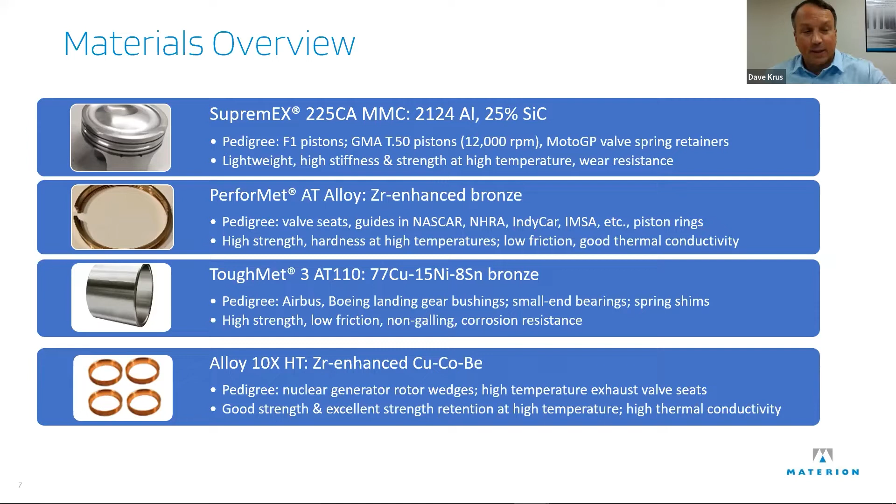So as we're talking about these materials and going into the examples, there's a couple of things that I would like everyone to remember. First of all, most people know this. With all of the design software and help that we have, and all that we already know about creating engines and building things, the only remaining limits on design are the material properties. You could design anything, you just can't find the materials to make it work.

So if you can have materials with a larger band of properties, or more of a combination of properties, it allows you to design more. It takes the limits off your designing. And the other thing is, looking at it from the other perspective, if you've got something you've designed and it's not working, it's so much easier to just find a material that works than to change the design.

There's a lot that goes in with the testing and changing the material, but just think of changing the dimensions on a print versus changing the name of the material. You change the name of the material, cross it out, put the new material in, they make it the same, it fits in. If you start changing the dimensions, then you've got to change the mating part dimensions, and you've got tolerances and all these issues that come in. So just swapping out materials, a drop-in replacement, that's a lot of what we're going to be talking about today.

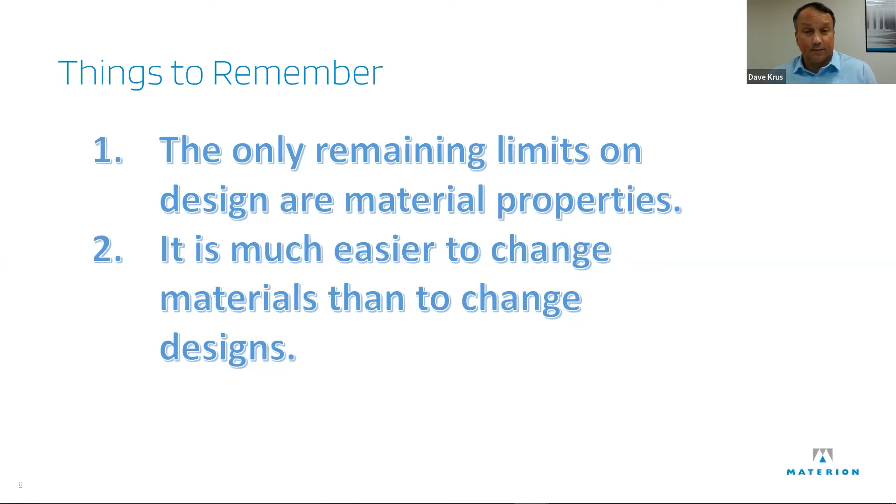So I've told you these materials are used in racing, told you they've got nice property combinations. For those of you who've seen the EPARTrade webinar that I think we did in early fall, this is a very high level overview of that, just to let you know that these materials are not only enabling design changes, but they also can last. There'll be a link after this to the EPARTrade webinar, as well as a white paper on the details of this testing.

So Materion sponsored this testing at Cosworth in the UK, and they got a 2.3-liter EcoBoost i4 crate engine, brand new, and re-outfitted it with Materion materials and redesigned the parts around it. The pistons were cast pistons with a cast-in ring groove insert. I put my cursor on it; you might be able to see there's a cast iron ring groove insert in there.

And so by switching to SupremEX, which is stiffer, still the same lightness, and doesn't need groove protection, they were able to reduce the piston mass by 20%, the pin mass by 16%, and by raising the ring groove closer to the crown.

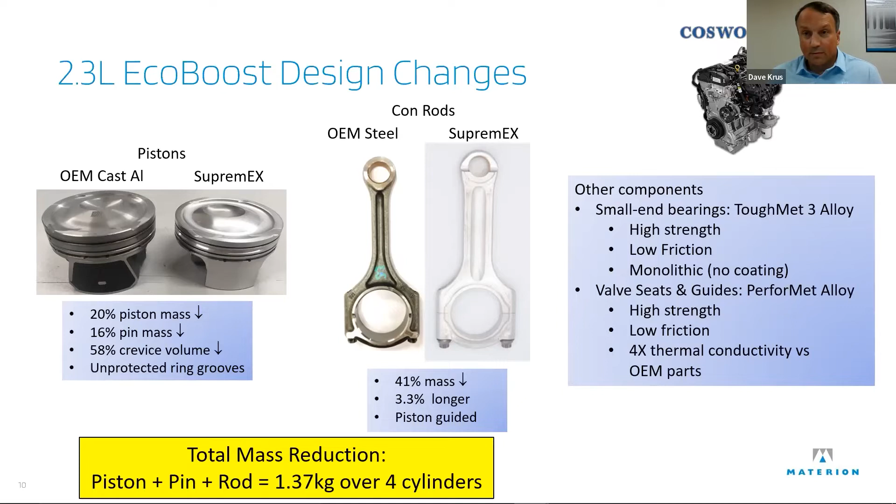So we asked Cosworth to put it through an OEM level durability test. And this is the test up here in the upper right. So you idle for 15 minutes. Then there's about 12 minutes at maximum torque, wide open throttle. Then you get max power for roughly 12 minutes, and a few minutes, not quite 5, of 90% power. Do that 225 times. So that results in 150 hours and 96 at wide open throttle, and absolutely no performance changes were seen related to the Materion parts.

They blew the head gasket twice, so it shows you they were running the engine pretty strong. And there was no measurable wear on any of the parts. They expected that from knowing what they know about the pistons and the PerforMet for the seats and guides. The ToughMet, the rod was a surprise to them. Actually, no problems at all with it. And the valve seat recession was so minimal, 1 to 2 microns of increase in valve lash. That was about it.

So these are now materials that we tell you about. They'll last, they work, they're being used in racing. So the idea behind this is having this in your toolbox. You're going to come up with this thing where if only the material would just do this. Think about these materials; that's where we're going with this.

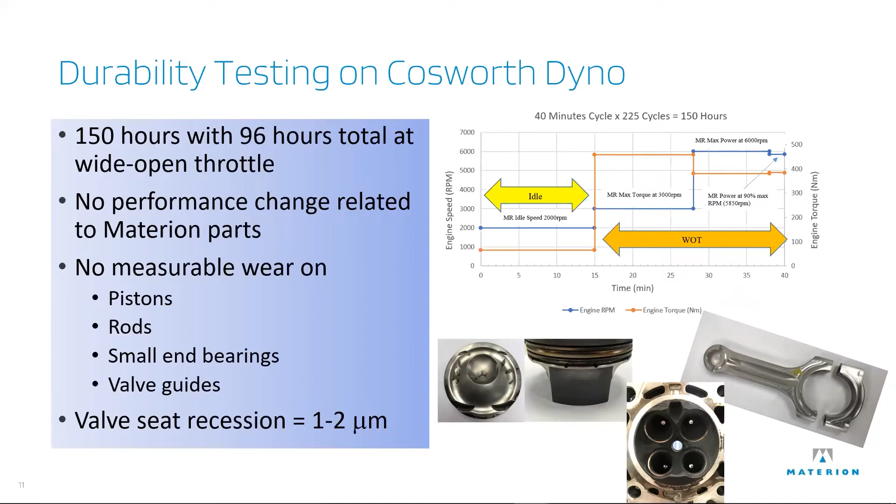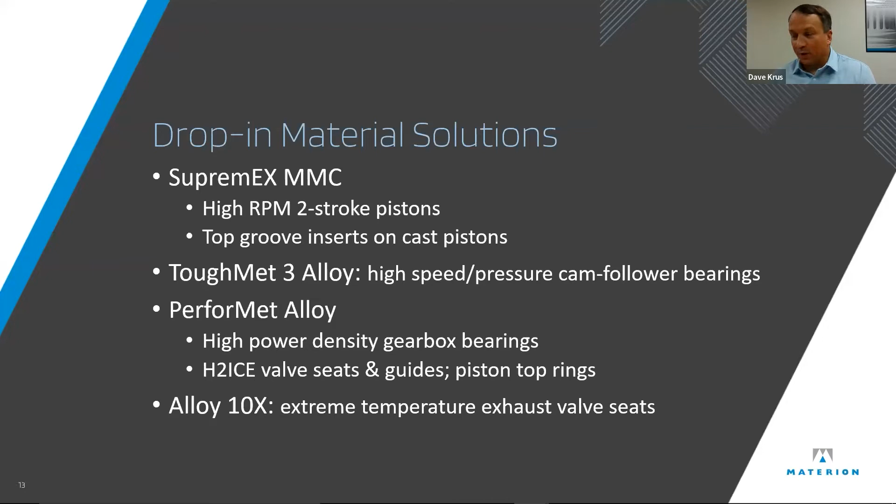So, going into these drop-in material solutions. One place that is a really difficult piston application, as everybody knows, is a two-stroke. Anybody who's run a relatively large snowmobile at wide open throttle for a long time knows that sometimes those pistons just don't last. The crown can crack from excessive combustion pressure or detonation, either fatigue or a single event. You get the pre-ignition event, like down in the center there on the right side, that just takes off the top ringland. Or something happens with skirt fatigue. You're slapping, you're running it too hard against the liner.

So having a material that doesn't add weight and is stronger and holds its strength at temperature is a benefit here. And the material properties are hardness retention, so how much of that hardness stays after it gets hot or has seen some high temperature. Also the fatigue strength at temperature. As something gets hotter, when you bend it back and forth or stress it repeatedly, it breaks a lot more quickly, right? And then there's the wear resistance, the skirt coming in contact with things, and wear of the groove.

So if you can increase the hardness retention, the fatigue strength, and the wear resistance in the material, that is a benefit. And to find all of that in something that also is lightweight and has good thermal conductivity, Supremex is the drop-in replacement. You pay no weight penalty for it. Forged Supremex pistons have been put into tests that destroy other pistons and have had no problem at all. They're virtually indestructible in these kinds of tests. So to talk about that,

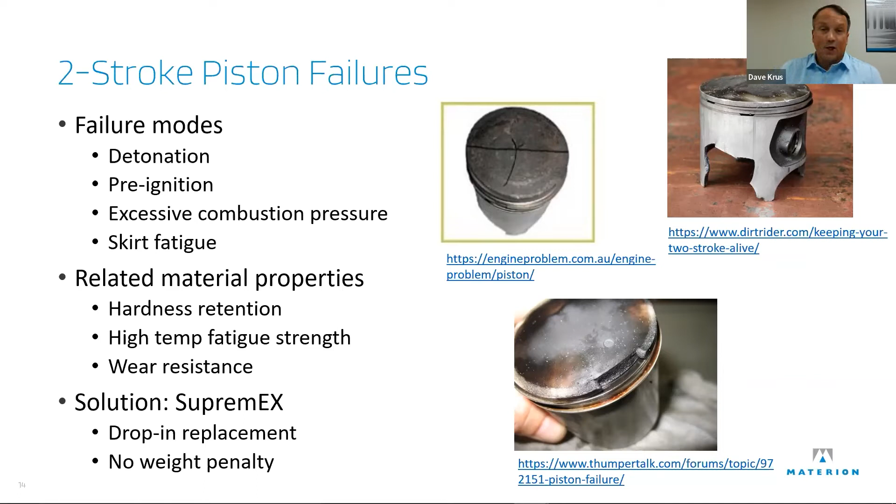you have to bear with me for a minute, because I thought I was going to be able to show you the piston I have in my hand here, but I don't think you can see that. So this is from the testing that we did at Cosworth. This is the relative change in hardness of different parts. This is going across the crown, 1, 2, and 3. Then the pin bore OD, the outsides of the pin bore in 2 spots on either side. Then up the skirt through 10, and 11, 12, and 13 were each of the top 3 ringlands.

And what you can see, the Supremex is usually in that 225, 230 Vickers range. And it lost some on the crown. They were running it hard, right? And this is only the base running. This wasn't through the 150-hour durability test that the cast piston lost this much hardness. But there's still a gap maintained between the two, right? And also on the ringland, it's still harder. The reason the ringland up here doesn't appear to have softened is because it's got that cast iron reinforcement piece in there.

But in general, across the board, during this 150 hours of testing, this Supremex piston retained its hardness, and the folks who have tested these pistons in dynos on two-stroke dynos have said the same thing. It's incredible how much hardness is retained after they put it through a wide open throttle test.

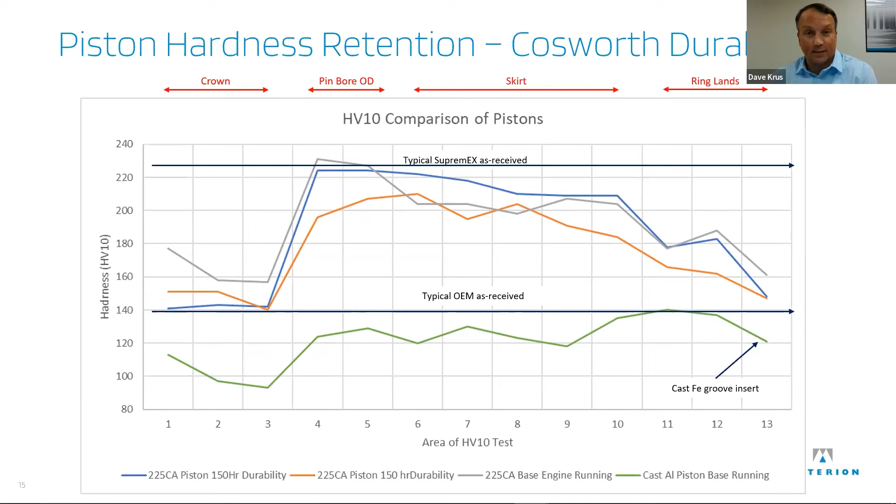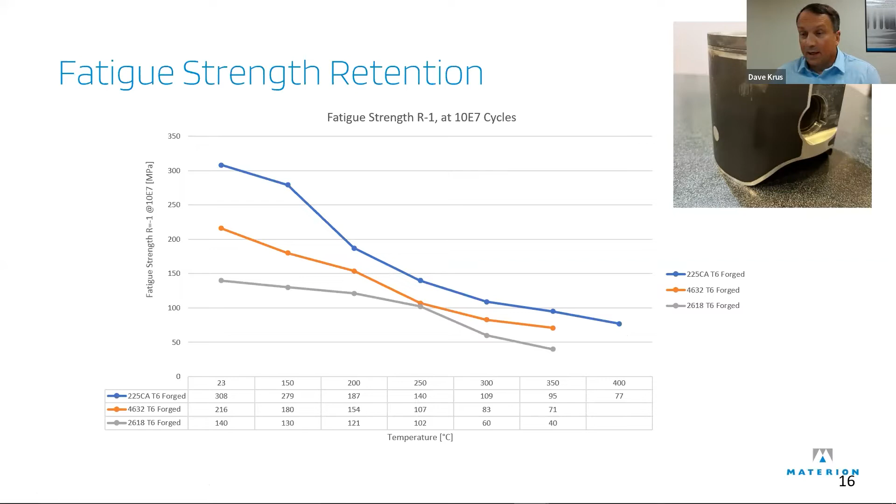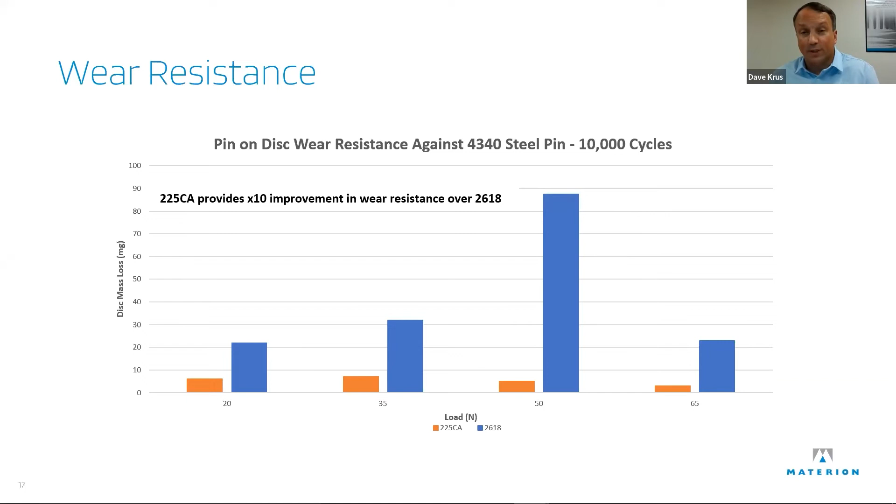So now thinking about that - remember we said that the groove wasn't protected in a Supremex. You don't need to protect the groove. Well, in forged or cast pistons, because that piston we replaced was cast, and some of the two-stroke pistons are cast hypereutectics - do you need to protect the groove in those?

Groove damage can come by low speed pre-ignition, and that's why all of our cars have - or most of our cars, depends on whether you tune yours or not, but most of the OEM cars have that groove insert in there. You can have knocking there. You can also have surface fatigue from the ring sliding back and forth if you get some friction there.

So what can you do on a forged piston? Everybody knows anodizing is a pain in the neck. Trying to get a narrow, deep groove like that anodized is really tough. Putting a coating down there isn't easy either. But if you don't, you've got a very limited life with a 4032 or a 2618 or even the cast hypereutectic. For the cast pistons, you can put in the ring groove insert, but there's a penalty that comes with that - it's heavy and it doesn't conduct heat very well.

So one of the things we came up with is the Supremex groove insert. We've already proven the groove durability. It works in that durability test at Cosworth. It's worked in other durability tests. And we did do a proof of concept on it that I'll show you next.

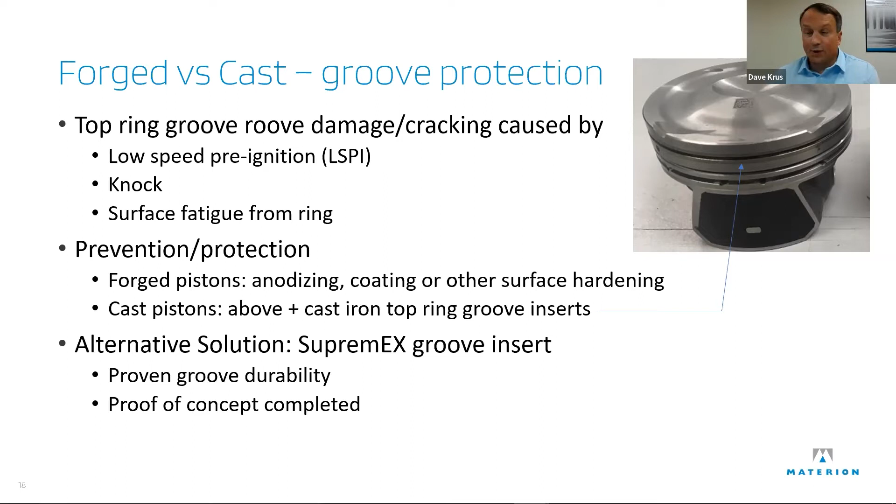So when our head of technology in our factory in Farnborough, England, that makes the MMCs said, well, yeah, you can cast aluminum around aluminum-based Supremex, I said wait a minute, it won't melt? No, it's because that ceramic reinforcement - he called it the ceramic skeleton - holds everything together. And if you do it quickly enough, it doesn't change the properties of the Supremex.

So what you see up here on the right is there's a little ring of Supremex. This is a round puck that we made. It was a gravity fed mold, and we just poured in aluminum around the Supremex, and boom, it worked.

Now you can see this is the first casting trial. You can see a little porosity at the interface, but if you do what they do with the cast iron rings - dunk it into molten aluminum first, then put it into the die casting mold, which shoots in very quickly -

you've got a very good bond there, so you've got that great wear resistance. The CTE match is better too, so the steel won't expand as fast as the aluminum. Naturally, if you get a piston with a cast insert in there and it gets hot, that aluminum is going to want to pull away from the steel that is not expanding as fast as it. So Supremex is closer to aluminum - it's going to expand and take up that gap more.

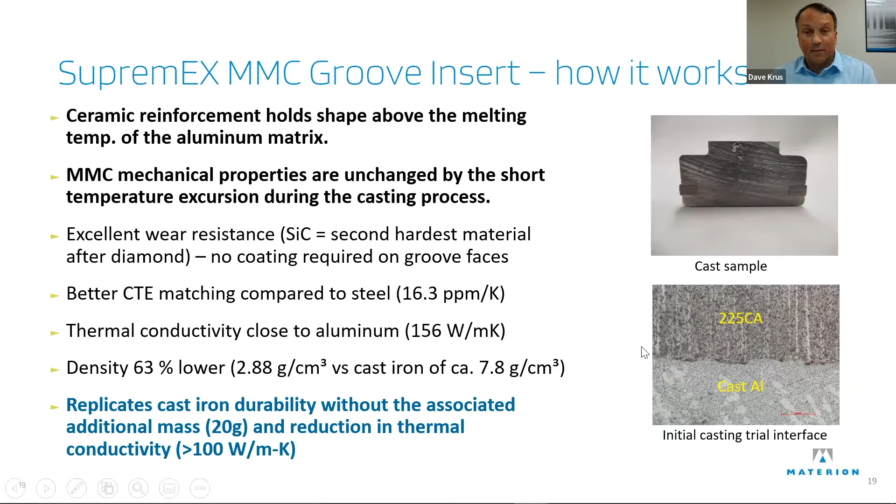So the next thing we're going to talk about, moving to the next application, is replacing needle roller bearings. A needle roller bearing is nice - they provide some low friction, they get a tight fit, and they're a pain to put together. They vibrate a little bit, and they're big.

But what can go wrong is you can get flat spots if you overload it in a stationary condition - you get flat spots on the rollers, that's called Brinelling. The cages can twist - I'm sure people have seen that, where the cage twists and needles are all over your engine. That's not a good thing to have happen. And impact failures - again, you could blow the cages apart with an impact. And if for some reason your filters aren't doing the job, or you're in a dirty environment, lubrication contamination is bad for those small little spaces in the needle roller.

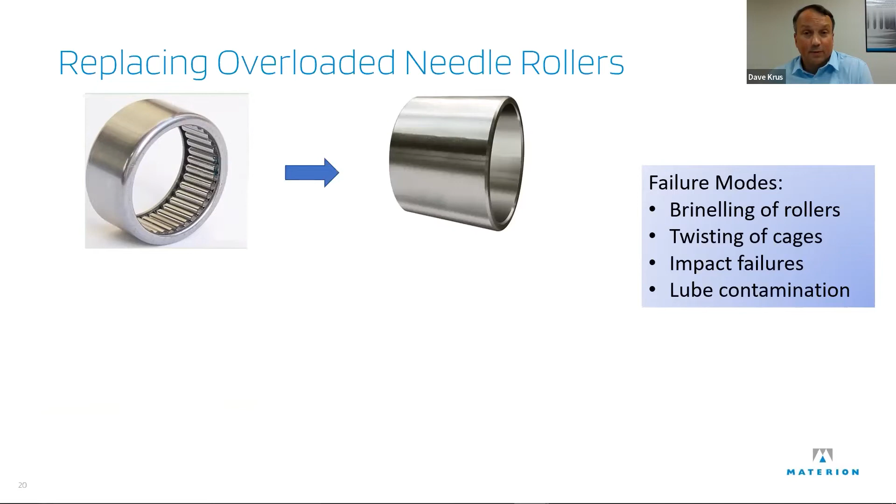So what if you could just change that to a plain sleeve bearing? Saves some space and takes away a whole lot of the failure modes. It needs to be something that's low friction, needs to be something that's very durable. But going from a needle roller bearing to this is like going from the automated serviette to a napkin - it's just easier, it's cheaper, it's simpler, and it works better in a lot of cases.

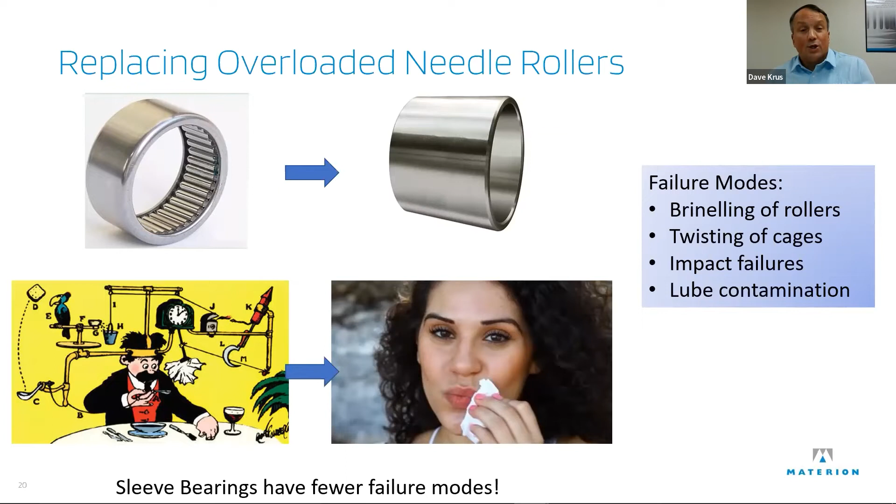So to get to the application in racing, I've got to tell you about the first time we did this - it was in a pneumatic torque wrench by a company called TorcUP. TorcUP makes these very strong, very high torque pneumatic torque wrenches. The last one they were making was this Raptor - the Raptor 6,000 foot-pound Raptor, actually, so 8,100 Newton meters. And they were using needle rollers in the planetary gear bearings.

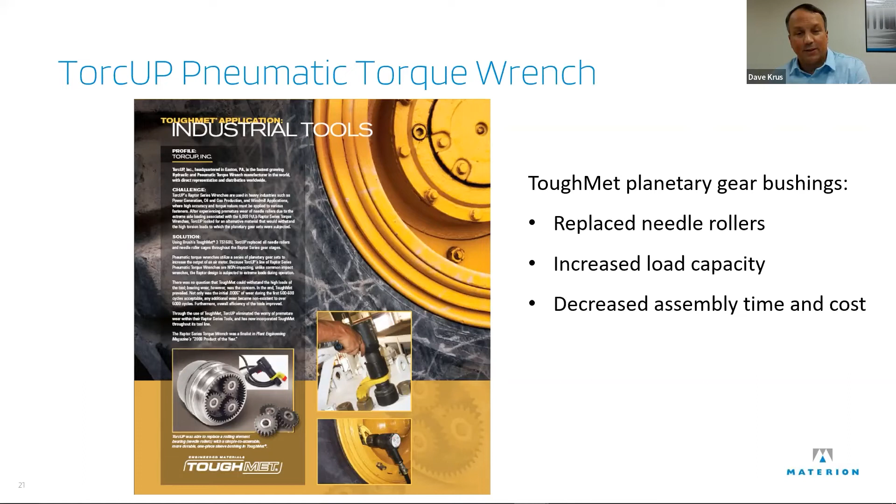And the needle rollers were actually, at the high torque, twisting and coming apart. So by switching to ToughMet, they not only made it more durable - they didn't get any noticeable increase in friction, and they increased the load capacity. The other thing that happened was they actually decreased their assembly cost, because the workers, rather than assembling needle rollers one at a time, were just popping these bushings in. And that allowed the launch of the Raptor.

This is a page from an old calendar we had at Materion, so we're thankful to the people at TorcUP for letting us use this.

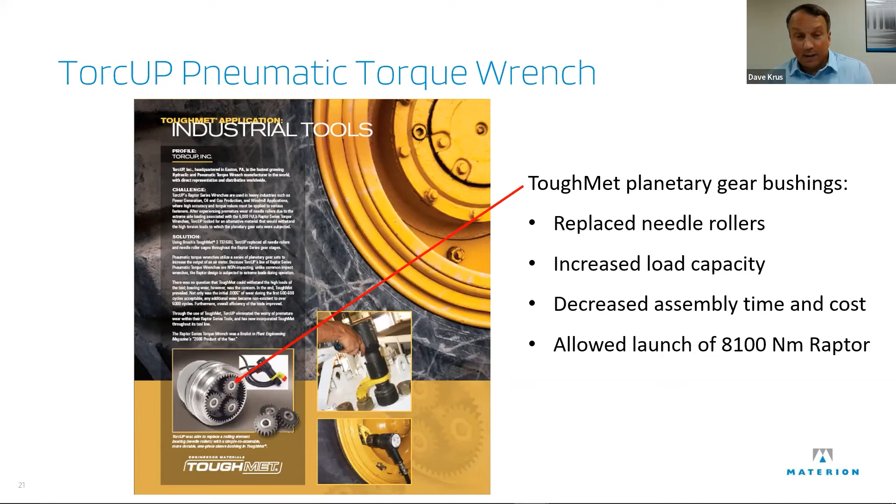But about that time, some people at Skunk 2 - and this was published actually in Race Engine Technology, which is why I'm saying Skunk 2 - needed cam follower bushings, and they were having some problems. They take out the VTEC and just run a double lifter like this, or a double rocker arm on the big lobe. It generates a lot of power, but it also generates a lot of pressure on that follower roller.

So when they couldn't find a needle roller that was specified at high enough PVs - 620,000 PSI surface feet per minute, which is high - and when they put in ToughMet, they were able to downsize the roller because it had a smaller area, which gave them less inertia, and it met the durability requirements. Never had one fail.

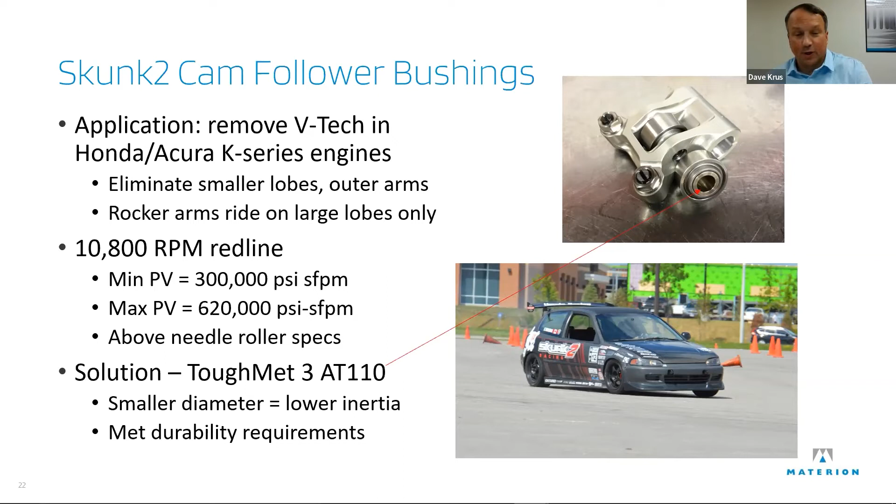In thinking of going from roller bearings and gearbox bearings to something else, as we're talking about hybridization in some of the talks today, think about e-axles. Or any high power density, high speed gearbox you would have—could be in a transmission, could be a differential.

This relates particularly to e-axles. If you look at an e-axle, it's putting the electric motor, the gear reducer, and the inverter all in one small package, as small as possible. That gives you good efficiency when it's all together. You put them in line with a planetary gearbox, and that efficiency gives you longer range because it's a small package. If you've got a front wheel drive car, you can just bolt it on the back wheel and you've got a hybrid right there.

But now you've got a problem. You put a lot of electrically generated heat, resistive heating, plus frictional heating from the gearbox into a small package that doesn't have much chance for lubrication, and definitely doesn't have a radiator on it. The other issue is noise and vibration—you want to keep that down. That's why some people use needle rollers, but if you can get rid of them, you'd reduce the noise and vibration. For something like that Lexus, that's important—you reduce the cabin noise.

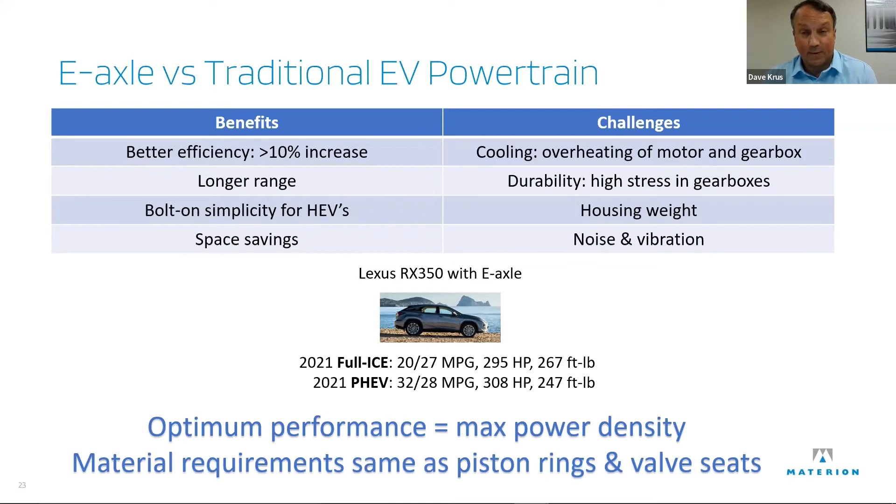So here's a gearbox. I couldn't find a gearbox picture that isn't somebody's—this is GKN's. They don't use or endorse PerforMet, I just wanted to credit them for a nice picture here, but you can see the inline planetary gearbox.

As you get the smallest package, trying not to have needle rollers in there because of the space and the vibration, it can overheat and the lubricant can break down. What happens then is if the lubricant breaks down, it either gets really noisy with needle rollers, or if there are bushings in there, it tends to seize to the shaft—everything swells, there's no lubrication, and it seizes.

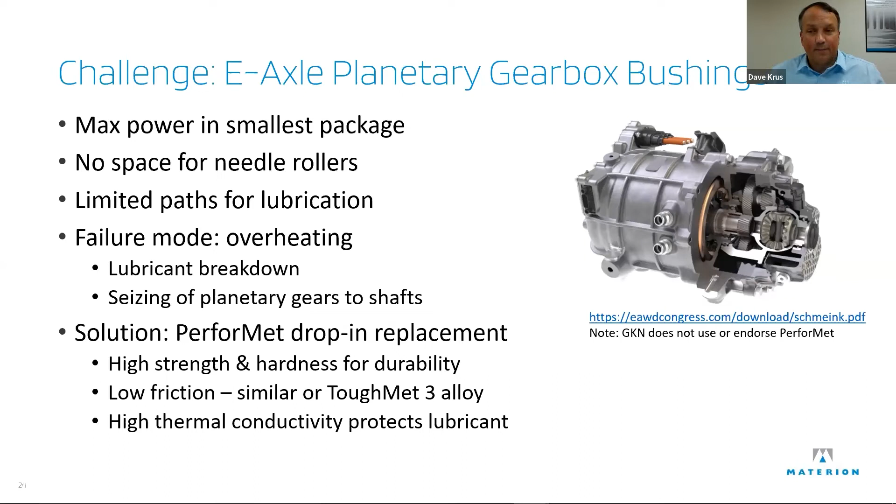So a solution to that is PerforMet. We've found that PerforMet performs at low pressures and high speeds as well or better than ToughMet as a roller bearing or gear bearing like this. It has the high strength and hardness that gives you durability. PerforMet has a similar coefficient of friction under these conditions, but it's got 4 times the thermal conductivity. So when things get hot at the center of that gear, it can dissipate the heat and pull it away. It's working in a couple applications now.

Looking at the properties: if you take a typical aluminum bronze used for these applications, for planetary gear bearings, and compare it to ToughMet, but especially to PerforMet, you get a lot more hardness for durability. The thermal conductivity is a factor of 4, even more than 4 over ToughMet. And believe it or not, the coefficient of friction and wear rate is lower than with ToughMet. So PerforMet is a solution for any gearbox where you can't run it as fast or as high as you want, or make it as small as you'd like.

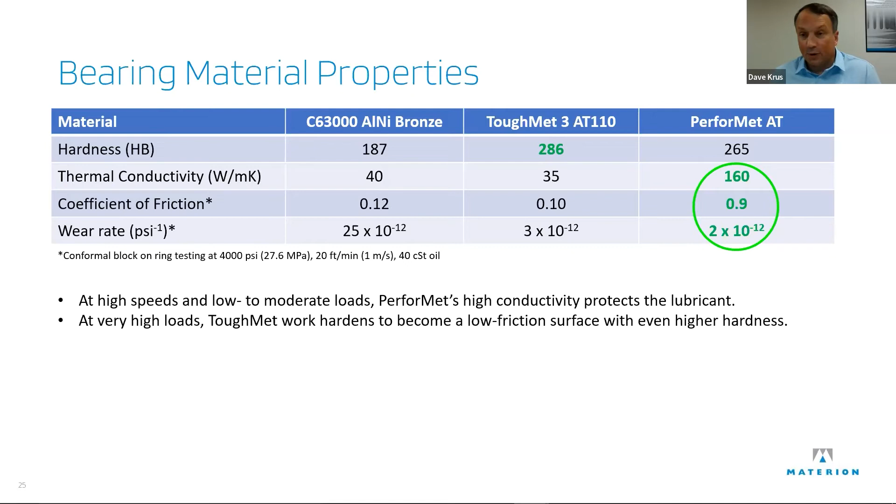We have gobs of data on the testing, but at least you can see PerforMet, the red triangles, has a wear rate in our block-on-ring testing that is 1/10th to 1/100th that of the aluminum bronze, and very similar to the best ToughMet we have, the TS95.

All right, so keep switching gears here, but that's okay. Real quick, Dave, I've got—I guess you'd call it a big dummy question. What's the difference, or can you clarify, between a bearing and a bushing?

Oh, yeah, good point. Okay, it's a lot of words. A bearing is anything that takes rotation. It can be a thrust bearing or a journal bearing; for these purposes it's anything that rotates around a shaft or has a shaft rotating inside it. A bushing is a sleeve bearing or a plain bearing. It doesn't have rolling elements. So I'm probably getting sloppy and using them

interchangeably. Well, just watching and hearing everything that you're saying here, I'm getting blown away with the ability to take what appears to be a solid bushing and put it into a roller bearing position and have the same effectiveness, if not better results, than you can with the previous. It speaks very highly of the folks at Materion. It's like the mad scientists: they take a little bit of this, a little bit of that, mix it together, and all of a sudden we're able to accomplish all the above and not generate more heat in the process. Which I think is phenomenal.

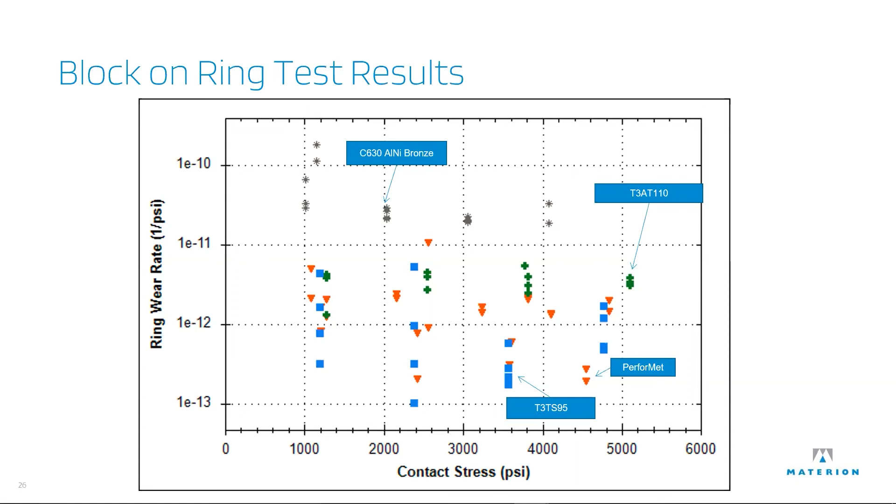So carry on. Like I said, I wanted to ask that question for my better understanding of what I'm watching here. No, yeah, I appreciate that. Go ahead and interrupt me anytime. That's fine. Well, thank you.

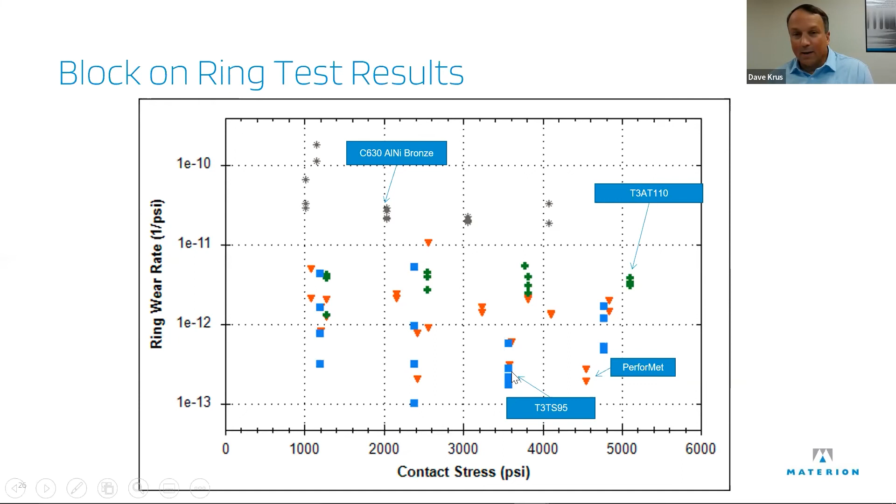Yeah. So now getting a little more ethereal, because I had ethereal in the topic here. We're seeing a lot of interest in hydrogen ICEs, not fuel cells, but hydrogen ICEs. There's a lot of investment in it, right? And if you can make it, tank to tailpipe, it's carbon neutral. And if you can make green hydrogen, it's even better, but it's not going to generate CO2 out the tailpipe. It uses an existing engine architecture that we all know and love, right?

And that's one of the things I've heard may be a way if there's pressure on racing in the future about carbon neutrality. Hydrogen's one of the options to keep that roar going and only put water out the tailpipe. I hope it never comes to that, but it's a good solution for long haul transportation and for power generation, because you can store a lot more power density in hydrogen than you can in a battery, for example.

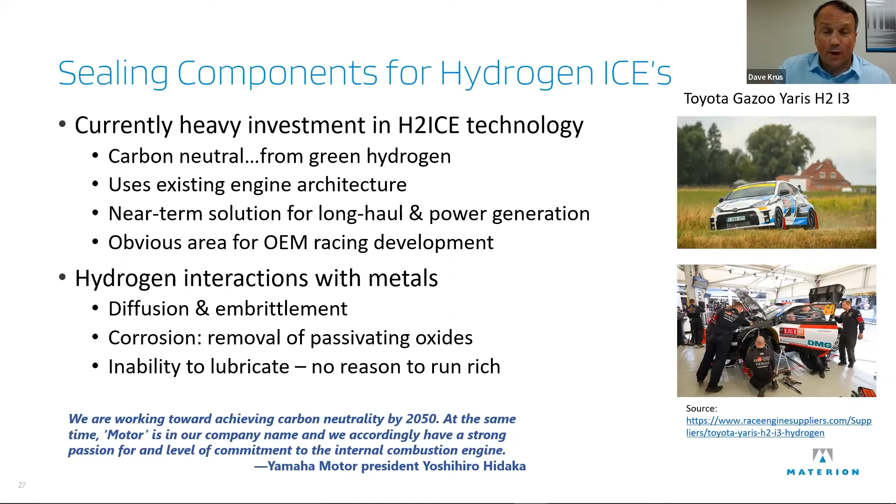So needing to find something that is lower in friction. And we know that PerforMet is low in friction, it doesn't have corrosion issues in hydrogen because it doesn't have the native oxide. But then what does it do in hydrogen?

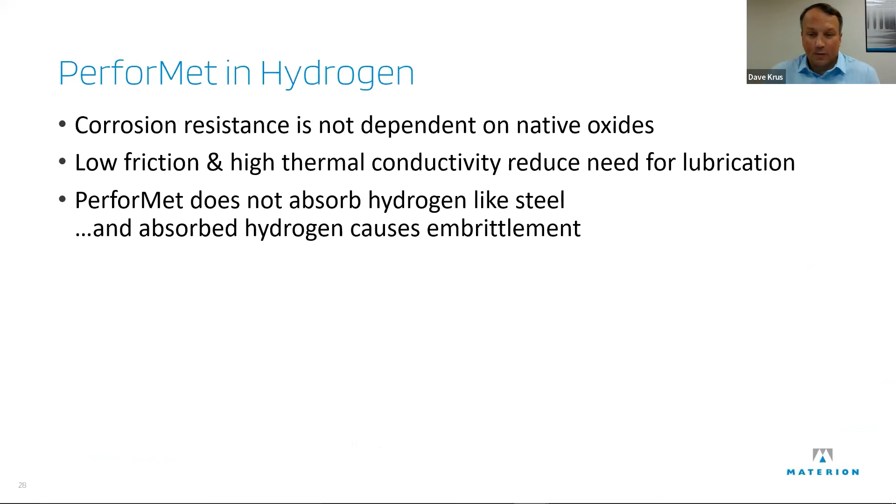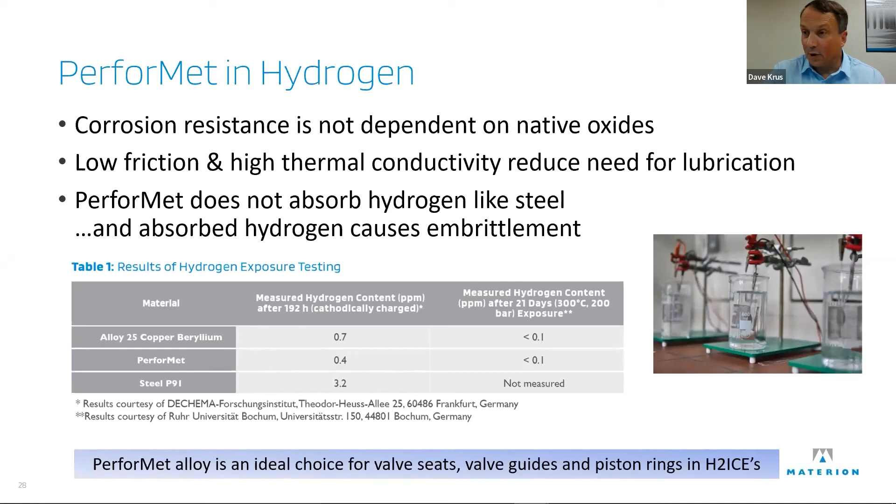So alloy 10X is the ultimate valve seat alloy. It's similar to the alloy 3, which has been traditionally used forever in exhaust valve seats. It's the redder of the two copper berylliums. And we have this alloy 10X because it works where alloy 3 can't. It's developed for nuclear generator rotor wedges.

And there's a condition, at least at one point in the design of these, where there might be enough current through the rotor wedge to hit 800 degrees Fahrenheit. So it had to hold the strength at 800 Fahrenheit, right? And it had a minimum ductility requirement, a minimum strength requirement, also with the thermal conductivity, and in this case, electrical conductivity, which are related.

So what happens in precipitation hardened copper alloys like these is as you get close to something called the recrystallization temperature, and that's a whole metallurgical class I don't think I could ever even give, but as you get closer to that, the ductility goes down. You would think as you heat it up, it gets wobblier and softer. Well, it actually gets more brittle for a start and then goes through a transition. So if you put in a little bit of zirconium, you raise that recrystallization temperature and allow the metal to be used at a higher temperature.